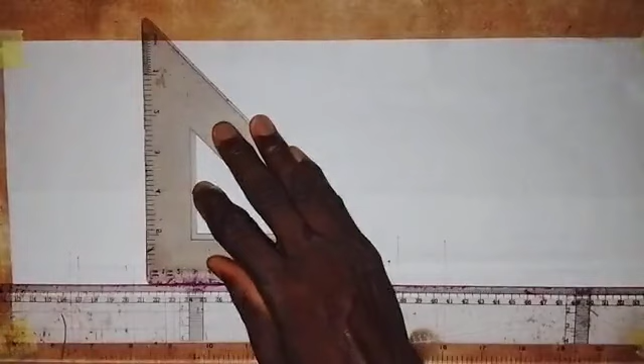Now, the first thing that we are going to do is to draw the axis. So we first of all draw a vertical line. So here we have a vertical line. On this vertical line, we are going to take a measurement of 90 millimeters. So I'm going to draw a horizontal line here, just a short horizontal line like this.

And then we take a measurement of 90 millimeters from this point. So we take it up. So 90 millimeters, this is 90 millimeters. So coming to this point also, I will draw a horizontal line at this point here.

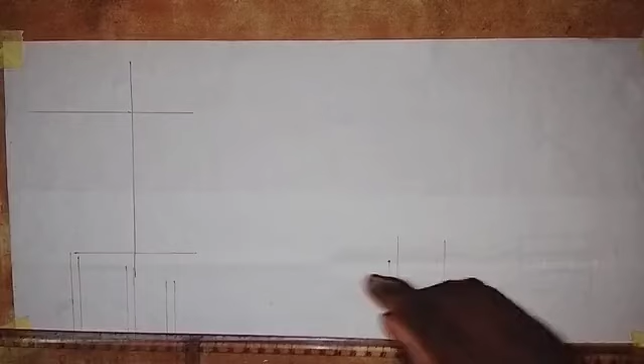Okay, so having drawn this horizontal line that we have here, both up and down, I'm going to label this point as point A. So this is point A here. Okay, so I need to make sure. So this is point A, and this point I will call it point C here.

So we are going to construct angle 45 degree at this end here and angle 120 degree at this end. Now, how can we construct that angle 45 degree? So this is how I'm going to do it. Just listen to me and pay attention. So I'll come to this point here. This is point A here. I'm going to draw a semicircle like this.

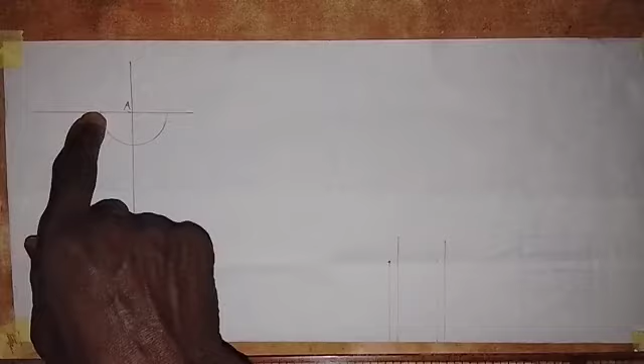Okay. So if you look at this angle, the angle to this side from point A is 90 degree. And the angle going to this side is also 90 degree. So I'm going to bisect this angle 90 degree. So let's look at how we can do it.

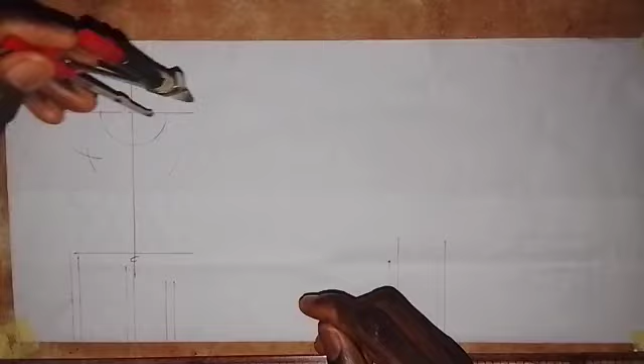So put the pinpoint here at this point, and then we are going to draw an arc here, and then I put at this point. Putting at this point, I will also draw an arc here to intersect this arc. I'll draw an arc to this side, and then coming to this point here where the semicircle touches this line, I will also draw an arc here. All right, so we can bisect this angle.

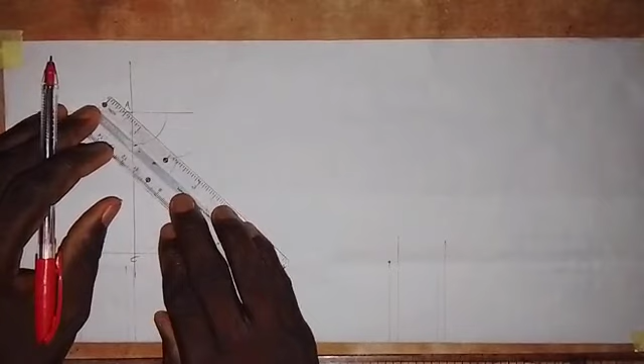Okay, so I only need to get a point on this semicircle. So I need to get a point here. So I draw this line from this point passing through the point of intersection of the arcs. I come here also, so draw a line from point A passing through the point of intersection of the arcs. So here we go like this.

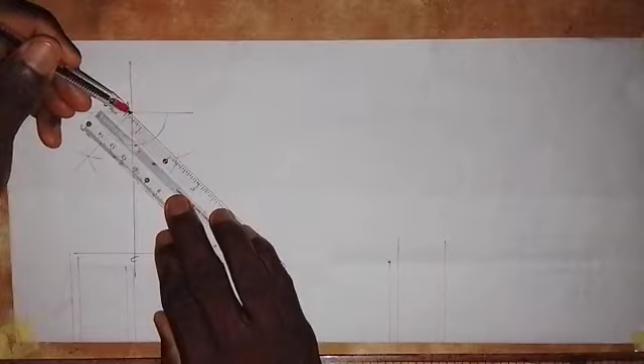Okay, so we have not gotten the angle that we need because this angle from here to here is 90. But what we want to get out of this is 45 degree. So from here to here is 45 and from here is 45.

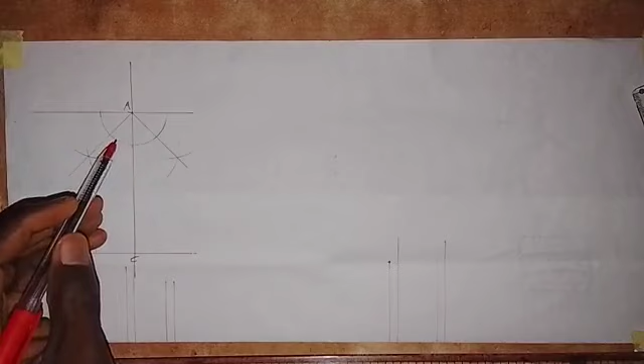So I'm going to bisect this 45 and I'll also bisect this 45, so that from this to this side will be 22 and a half, and from here to here will also be 22 and a half degrees. So the total will now be 45 degrees. So let's look at what I'm saying.

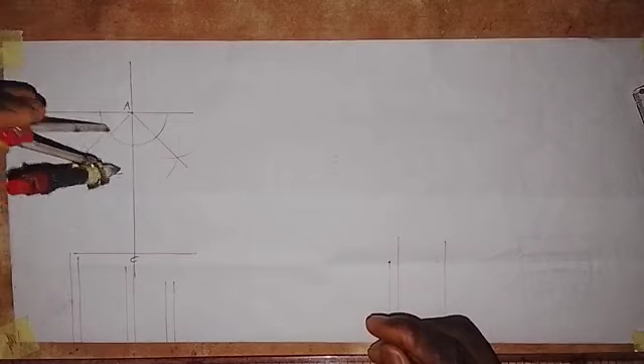So let's put the pinpoint at this point here. Okay, so we extend the compass a bit, and then we draw an arc here like this. And then putting it at this point here, I will draw an arc here, and I'll also draw an arc to this side. Then putting it here also at this point, here I will also draw an arc. So with what I've done here, I've gotten out angle 22 and a half degrees to either side.

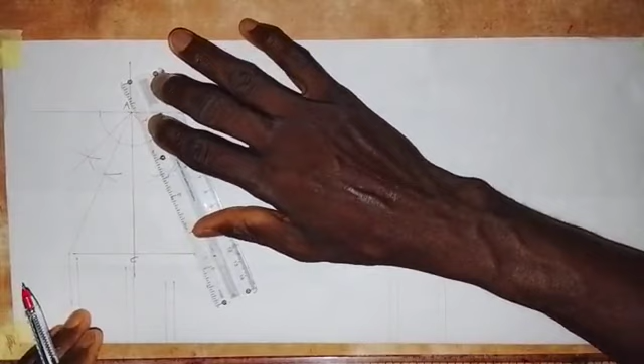So I'm going to draw a line from point A, going in this direction like this. Then from point A again, I will draw a line passing through the point of intersection of the arcs, and it goes like this. All right, so the angle from this point to this point is 45 degrees, because from here to here is 22 and a half degrees, from here to here is 22 and a half degrees.

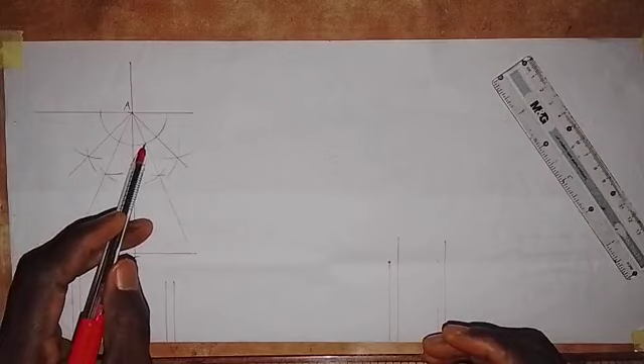Also the same thing from here to here, 22.5 degrees. From here to here, 22.5 degrees. So the total from here to here is 45 degrees. As simple as that. Now we have constructed angle 45 degrees up here at this end. Now I want to construct angle 120 degrees at this end here.

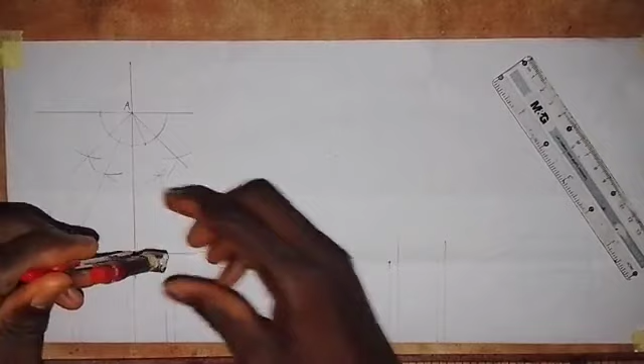So what we need to do is put the pinpoint here at point C, and then we are going to draw a semicircle like this. With the radius of this semicircle, put the pinpoint here and make an arc here to this side. You see, the angle from here to here is 60 degrees. Then I will also make an arc here to this side. So from here to this point here is also 60 degrees.

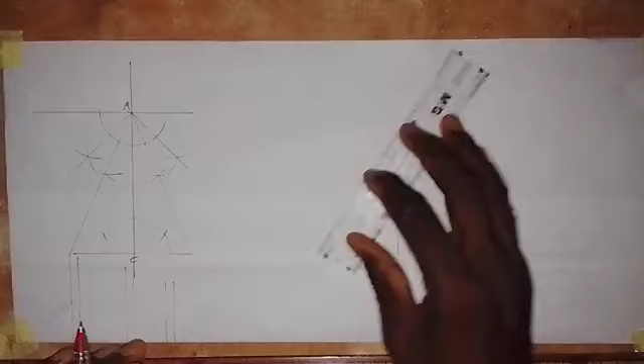So what I need to do now is draw a line from this point C, passing through where the arc touches the semicircle, and I'll also draw from here, through the point where the arc touches the circle. So this angle from here to here is 120 degrees.

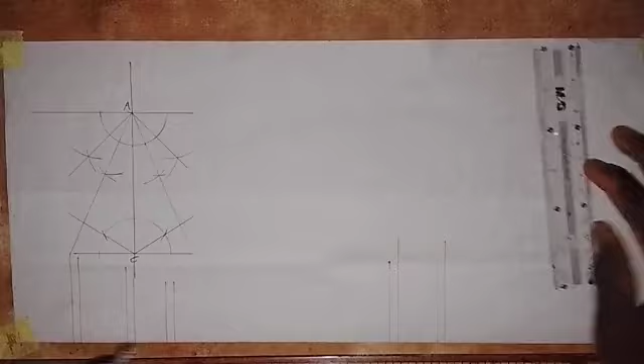So with what we have done here, all we have to do is to bring out the thickness of this line, to make it a thick line from here to here. And then we also make this a thick line from here to here. And then we also make this a thick line from here to here, to bring out the edges of the kite. So we also have this. All right, so this is the kite.

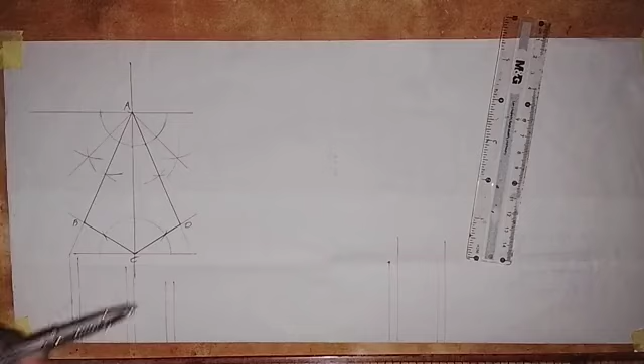This is the kite. I'll call this point B, and this is point D. So we have a kite ABCD. We are given the axis AC, 90 millimeters, and this angle here is 120, and this angle at this end is 45 degrees. As simple as I've done it here, all you have to do is to practice.

When you practice this, you become a master at this work.